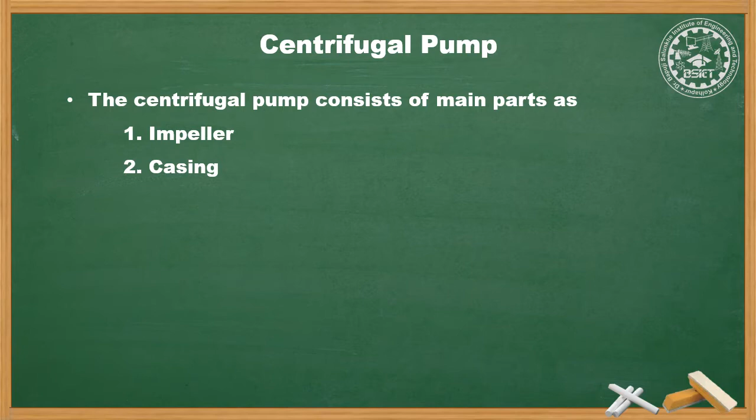Second, casing. Casing is the part in which all the assembly of a pump is fitted airtight so that no leakage of water or fluid takes place. Third, suction piping system, and fourth, delivery piping system. The piping for the pump at the suction side and delivery side. These are the different parts or main parts of the centrifugal pump that we are going to study in detail.

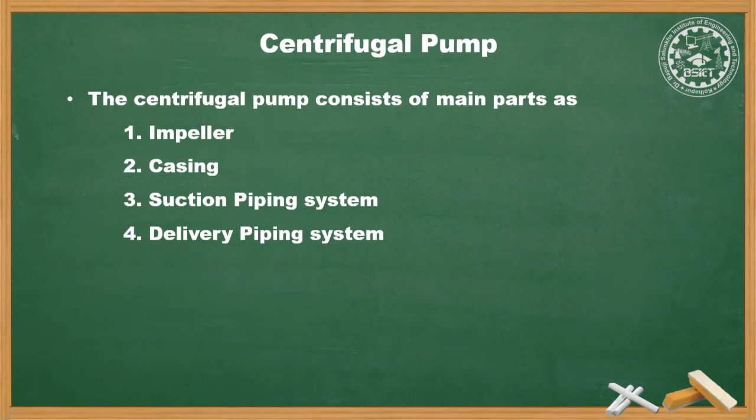With the first point, impeller. The impeller is a device consisting of a rotating wheel on which a series of backward curved vanes are fitted. The impeller is mounted on a shaft, and the shaft is concentric with the casing. The shaft is coupled with the electric motor. The impeller increases the velocity of water, which imparts kinetic energy, hence increases the centrifugal force on the working fluid, and so gives the pressure head.

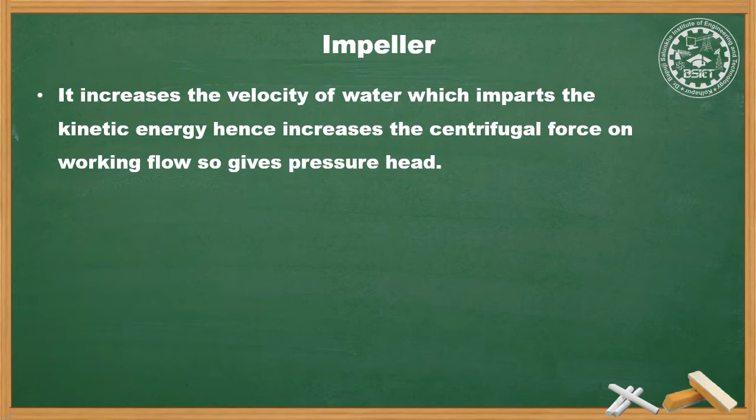The vanes of the impeller have different types and different applications. The impeller is an important factor. This factor influences the operation of a centrifugal pump because the pressure is created by the impeller. The impeller has different types which help to create different flow or different pressure. The different types of impeller help both in pressure development and in head. The types of impeller are shown in the figure below.

The vanes of the impeller having shrouds on both sides, as in the case of a radial inward flow reaction turbine. Such an impeller is called a closed impeller or shrouded impeller, as shown in figure A, and is used for pumping of liquids which are pure and free from foreign material. The impeller diameter here is relatively large.

The vanes only have one base plate and no crown plate. These impellers are known as semi-open impeller or mixed flow impeller, as shown in figure B. These are used for pumping of liquid which has some debris to some extent, that is impurities. The flow leaves the impeller half axially and half radially for high volume and low pressure. The rotor is adjusted to maintain acceptable clearance.

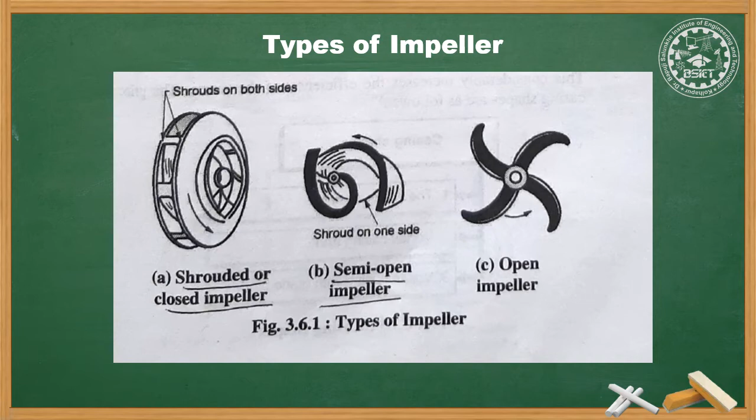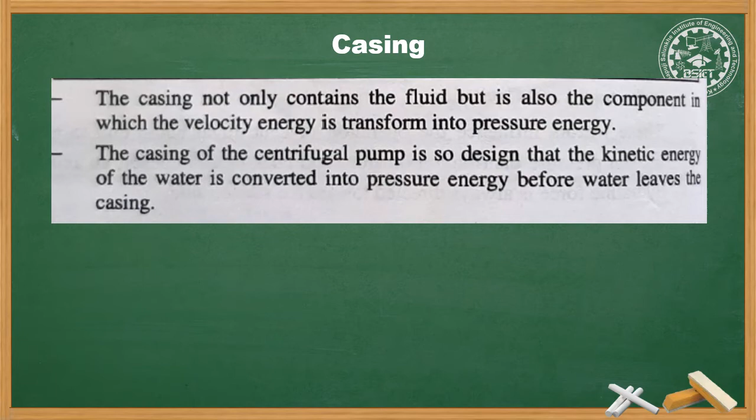The next part of a centrifugal pump is casing. The casing not only contains fluid, but it is also the component in which velocity energy is transformed into pressure energy. The casing of a centrifugal pump is so designed that kinetic energy of water is converted into pressure energy before water leaves the casing. The casing considerably increases the efficiency of the pump. The principal casing shapes are of three main types, as shown in the figure: volute casing, vortex casing, and volute casing with guide blades.

First, the volute casing. Volute casings are used in almost all types of pump. The spiral shape of the volute casing, with increasing sectional area, has an uneven velocity and pressure distribution around its circumference, as shown in the figure.

In smaller sectional areas the velocity is high; with reducing velocity in the larger area, pressure increases. This uneven pressure distribution results in a radial force in the impeller plane, which results in shaft deflection, constituting an oscillating load on the rotating element. The magnitude and direction of thrust change with the casing shape and mass flow rate, and affect the shaft and bearing. In this casing, a considerable loss takes place due to formation of eddies.

The second type is the vortex casing. It is an improved version of the volute casing in which the spiral casing is combined with a circular chamber, as shown in figure B. In this casing, eddy formation is reduced to a considerable extent and an increase in efficiency is obtained.

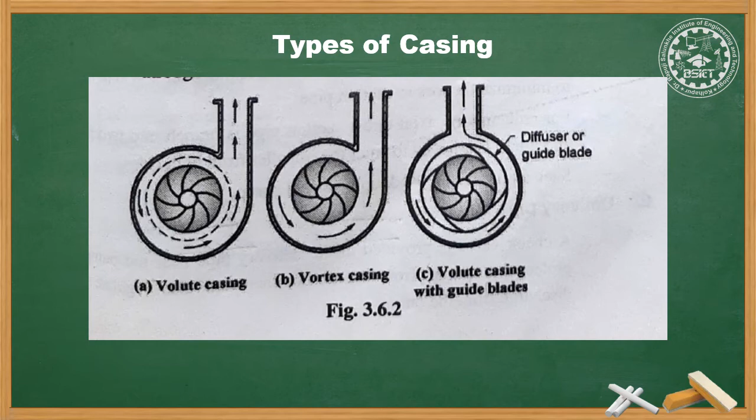And the third is the volute casing with guide blades. In this casing, a ring of guide blades surrounding the impeller, called a diffuser, is employed and is very efficient, as shown in the figure. These guide blades are arranged at such an angle that water enters without shock and forms a passage of increasing area through which water passes and reaches the delivery pipe.

Starting with the third topic, the piping system of a centrifugal pump. Before understanding the piping system, let us understand the different heads. First is suction head. Suction head is defined as the height of the water column which will rise before arriving at the pump. And delivery head is defined as the maximum height of the water column which will be reached by the pipe after the pump.

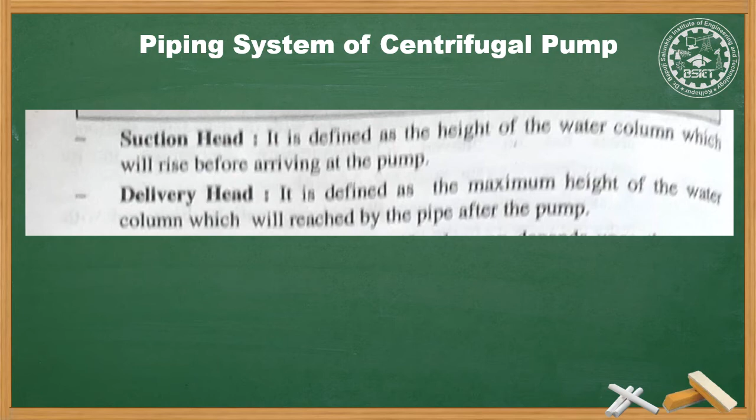Successful working of a centrifugal pump depends upon proper selection of pipe size and piping layout. A centrifugal pump has two types of pipes, as shown in the figure. The first one is the suction pipe. This pipe plays an important role in the smooth working of the pump. A poorly designed suction pipe causes insufficient positive suction head, vibration, noise, water hammering, excessive wear, etc.

The laying of the pipe should be airtight, and a strainer foot valve is connected at the bottom of the suction pipe, which restricts the entry of foreign material. Since there is negative pressure at the inlet of suction, its value is limited to avoid cavitation. Bends in the suction pipe are avoided and the diameter is kept large to minimize the loss in the suction pipe.

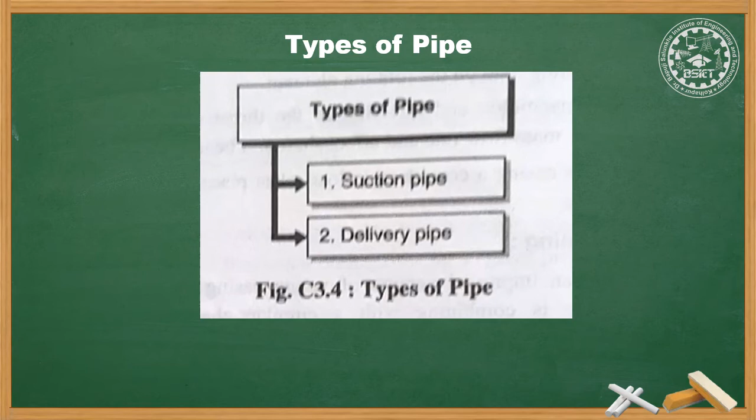For reducing axial thrust, the suction pipe is also branched into two parts and liquid is allowed to enter the impeller from both sides. Such a pump is called a double suction pump. And the second pipe is the delivery pipe. A delivery pipe is provided with a check valve near the pump to protect the pump from water hammer and also regulate the discharge from the pump. The size and length of the pipe depend upon the design requirements of the pump.

The centrifugal pump is used to raise a liquid from a lower to a higher level by creating the required pressure with the help of centrifugal action. The centrifugal pump is the most common type of pump used in every household application or in every building. The first step in the operation of a centrifugal pump is priming. That is, the suction pipe and casing are completely filled with water so that no air pockets are left. Now start the pump by external power supply.

The rotary motion of the pump impeller inside the casing full of water produces a vortex, which is responsible for imparting centrifugal head to the water. The rotation of the impeller causes a reduction of pressure at the center. Hence, the water in the suction pipe rushes into the eye near the rotating axis and is accelerated by the impeller, flowing radially outward or axially into a diffuser or a chamber.

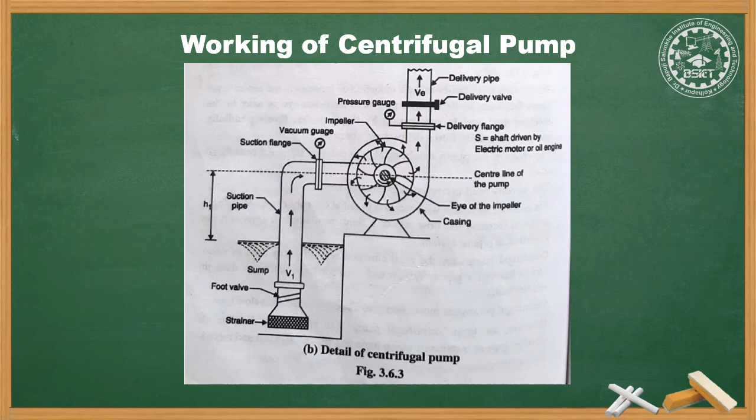Priming of centrifugal pump is the operation of filling the suction pipe, casing of the pump and a portion of delivery pipe completely with water before starting the pump, to remove the air, gas or vapor from the parts of the pump. If the air remains inside the casing, discontinuity of fluid flow is caused.

Centrifugal pump is suitable for large discharge and small head, whereas reciprocating pump is for less discharge and higher head. Due to rotating element, there is less wear and tear in centrifugal pump, whereas due to reciprocating element in reciprocating pump, wear and tear is more. Proper balancing is in centrifugal pump, whereas balancing is not proper in reciprocating pump. Centrifugal pump requires more starting torque. Reciprocating pump requires less starting torque.

Total weight of pump is less for a given discharge in centrifugal pump, whereas in reciprocating pump total weight is more for a given discharge. Maintenance cost is also low for centrifugal pump as compared to the reciprocating pump, where maintenance cost is high. Suction and delivery valves are not necessary in centrifugal pump, whereas in reciprocating pump, suction and delivery valves are necessary. Centrifugal pump has less efficiency, whereas reciprocating pump has more efficiency.

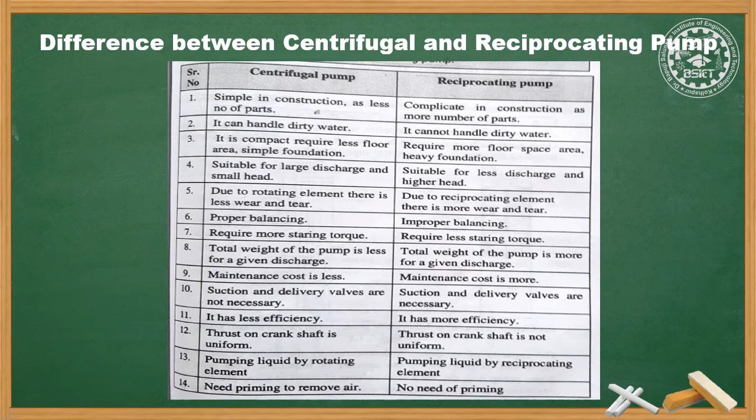The fluid accelerated by the impeller loses its kinetic energy in the diffuser, where a conversion of kinetic to pressure energy takes place. Each impeller in series forces water through the diffuser into the eye of the one above it. Each impeller will build up pressure in stage. Other parts include radial bearings and bushings distributed along the length of the shaft, providing radial support to the pump shaft.

The capacity of the pump is determined by the width of impeller as well, and its pressure by the number of impellers. With less number of stages a pump may deliver a high volume of water at low pressure, while with more number of stages a pump will deliver lower volume but at a greater pressure. As with centrifugal pumps, an increase in well depth or discharge pressure will reduce the capacity.

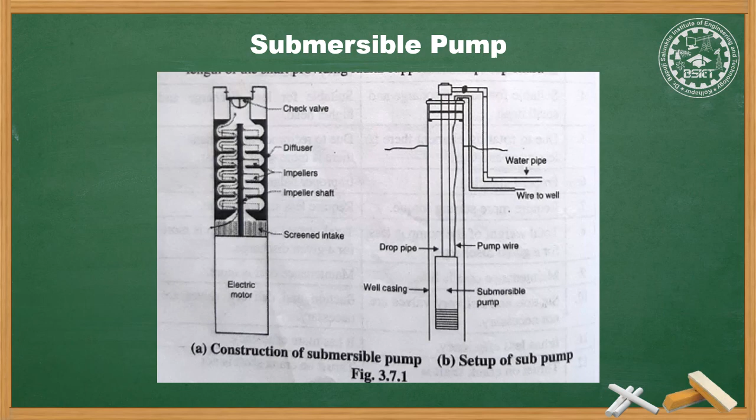It utilizes constriction to reduce pressure and provide suction. After priming the pump, a fluid is pumped through the centrifugal pump and enters an ejector nozzle. At the throat of the converging section of the ejector, the pressurized fluid is ejected with high velocity. Because of this, vacuum is created, developing low pressure at the throat section, which draws or lifts the required fluid from the well or other source up into the nozzle.

This type is used in marine to transfer sea water. It is also used to move wastewater up to the sewer line.

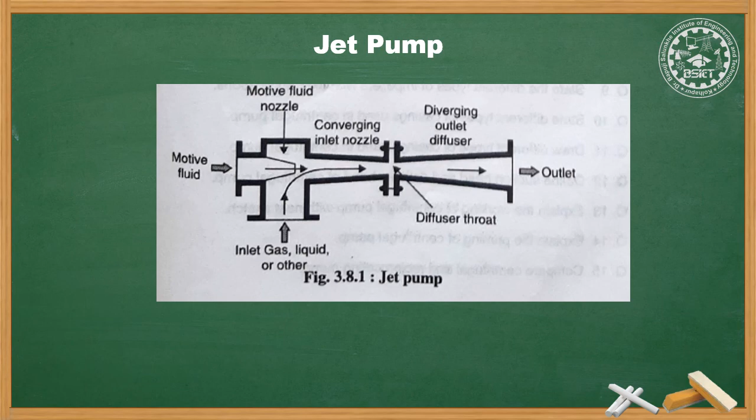Thank you. This is it for today's session. This completes our third chapter, chapter number 3, fluid machinery.